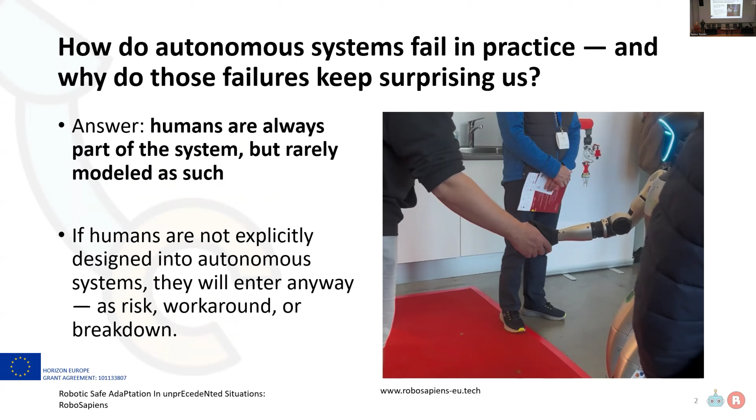Very briefly, what we do is that we observe robots in the wild. We go out in a number of workplaces to see how robots are actually working. Maybe you will say something about that, Peter.

Yes. So our methodology was, as you can see up here, we observed robots in the wild. Instead of doing it in the lab or doing a lot of simulations, we went out to companies using robots and how they were used, and had qualitative interviews with the people working there, walking around close with these robots.

And we compared all of these external field sites that we found, and we'll show you a picture later of a gathering of all of them. And we compared them to our internal field sites, where we had these 4 use cases, which we have heard from all 4 of them today, I think. And then we're using this sort of ethnography, which will allow us to observe different things that are not necessarily visible if you just look in the logs of the robots or in simulations or in KPIs for that matter.

So apart from looking at these robots who are already employed in people's everyday lives, and we'll come back to where, we also follow the process of designing in the RoboSAPIENS system. No matter what case we have been studying, even the cases when RoboSAPIENS began, we were told that in the Gunnerus, for instance, we wouldn't be needed because there wouldn't be any people involved. But of course, that was not really true. There were people involved everywhere. Even when we think that the systems we have created are completely autonomous.

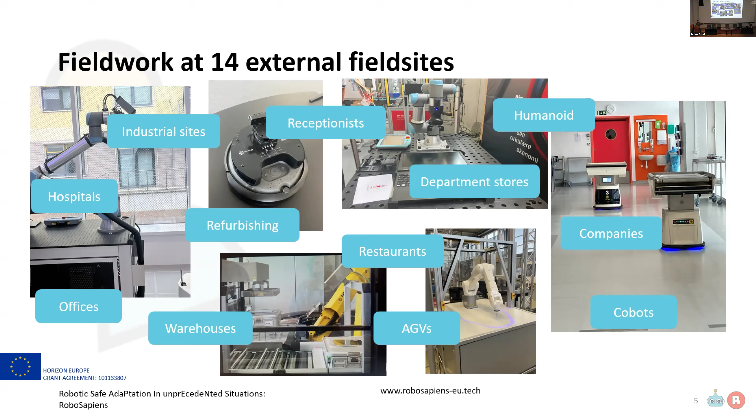And the reason we have done that is to actually see a variation. And when we have found this extreme variation in sites and types of robots, we have looked for what are there in terms of patterns that we can analyze goes across.

And one pattern we have seen across all these cases is that when we see the same robots that we're presented with in these real-life settings in media or at robot conferences, they do not look like they do in real-life functioning. They are much more well-functioning. They never break down. They never need human help. They are a completely different type of machines, you could say, from what we actually see in real-life settings.

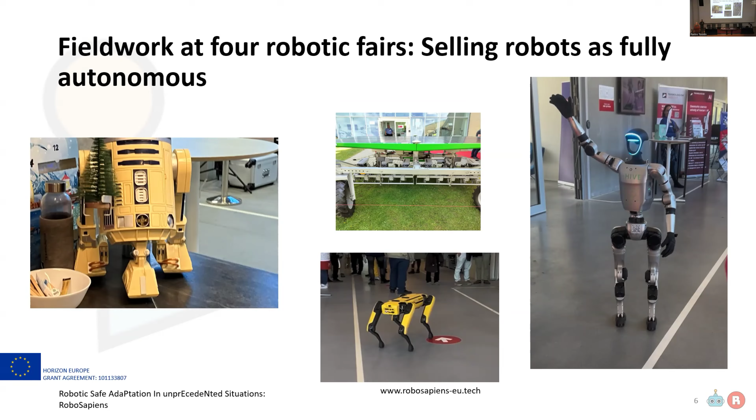You can supplement that? Yes.

At the conferences we've been to, robots are sort of sold as being more autonomous than they actually are, which creates expectations about full autonomy and adaptability of robots, both from the general public and also inside the field of robotics.

The reason for this is that the robots we see at these conferences are demos, and these are very controlled demos. Sometimes they're not even related to what the company and the robots they're selling are actually supposed to be doing—they're just a way to get people over to their stand. So the robots getting sold at these conferences are not really the robots being used in real life.

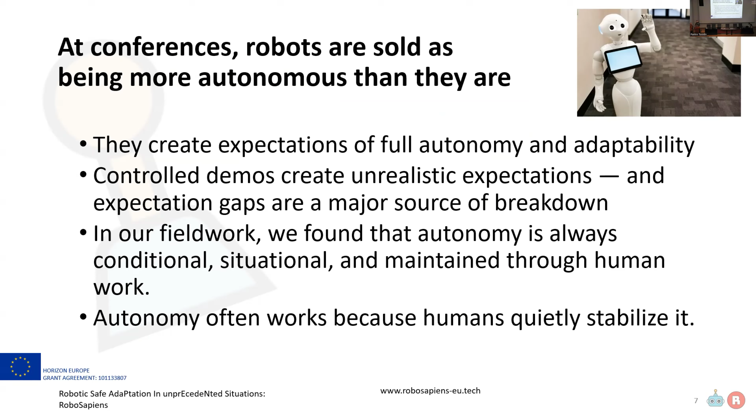What we're also seeing is that the autonomy sold at these conferences often only works because humans are there to stabilize it in some way. We have some examples of this, what we call collaborative autonomy.

We were at a restaurant with two robot waiters that helped deliver food, and a waiter dropped a glass. Usually these robots are supposed to stop if anything is in front of them so they don't hit customers or drive over glass. But in this instance, the robot was driving towards the glass, and the waiters had to quickly see it and press stop before it hit the glass.

They then had to guide the robot around the glass towards the station where it waits for the next delivery. While they were sweeping up the rest of the glass, the second robot came and drove completely through it, spreading it all over the floor, so again they had to stop it. The robot waiters don't really work without the human waiters there to assist them.

The second example is a company with a production department where, because of their more dynamic workflow, instead of having a conveyor belt through the entire factory, they have a big factory floor with 12 workstations and about 10 AGVs driving around between the stations and to a final conveyor belt to deliver various products.

When we were there, one of these AGVs, for some reason, stopped about 1.5 meters before the actual drop-off point, which led to a whole queue of AGVs standing in line, unable to deliver, and of course slowing down production in the factory.

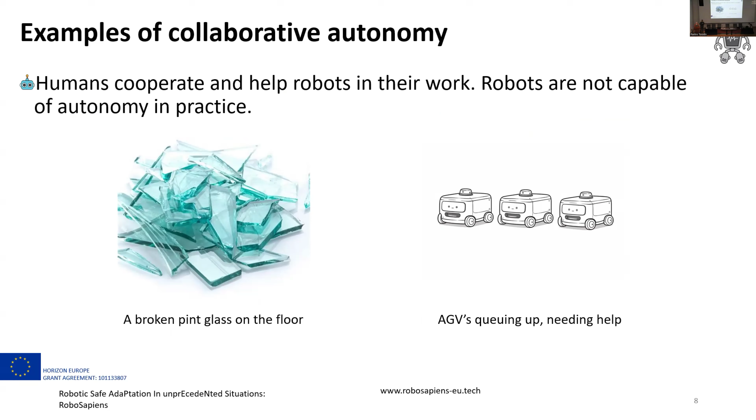This is something we see across all cases. We have never seen an autonomous robot in our studies—never seen a robot that could do without the humans around them. But that's not the story we are normally told.

So we think it's interesting to take this into account when we work with our partners in RoboSAPIENS to look at the transversal main analytical categories we found across all the cases: safety, trust, anomalies, sabotage, and sim to real.

In all of these, humans were involved. One example is that humans often don't apply the standards or rule-following that the technology creators think they should work from. In fact, across all cases, humans were not following rules—they were trying to make the robots adapt to their conditions, to what they think the work was about. So standards for safety are everywhere, but humans also break these standards or play with them.

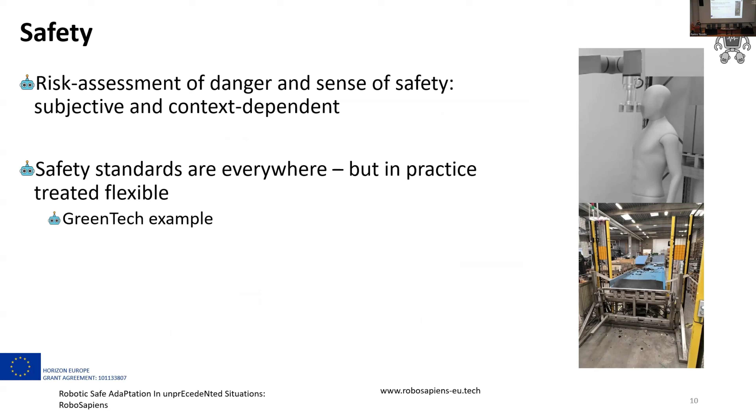The issue was that right on the other side of a little yellow fence, there was a very clear warning saying you should not put your hands anywhere near this conveyor belt or its start, because of the risk of falling electronic waste. What we observed, however, is that every single time they unloaded a container onto this conveyor belt, they always had their hands already rifling through it immediately, completely ignoring this important safety feature implemented at the company.

So humans are not just a nuisance in the system. The reason why they had a reason for doing so, it made their work life easier. But the people who made the robots had not inquired about what would make their work life easier. So it was a sort of workaround in the situation.

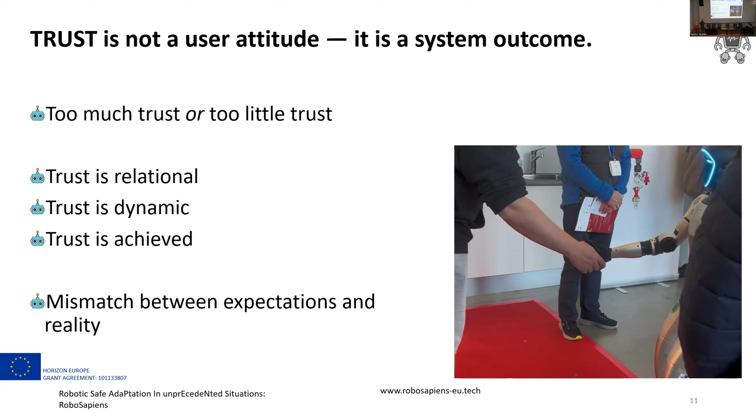Trust is another recurring theme, and we would say that that's also something that cannot be built into a technological system. It's something that comes in the dynamic between humans and machines. And it's often connected to this mismatch between people's expectations of robots as much more autonomous than they really are, and then the reality they meet. That can create even dangerous situations in our fieldwork.

And here we go back to these conferences a little, because there is this trust in robots. When you have too much trust in what a robot can do, it can lead to a perceived underperformance of what the robot can actually do in practice. We talked to specific companies selling robots to other companies, and the first thing they have to do whenever they're selling anything is say, it will never happen, it just can't, it becomes too complicated. So we have this 80-20 rule where we're trying to get the customer to scale back their expectations. About 80% of what customers expect, they can't live up to with these robots. And that's sort of the issue that comes with this trust.

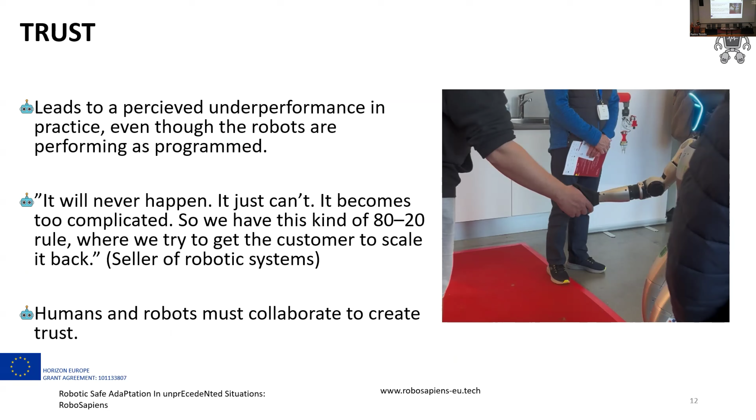This is people, even the people who are trusting it, even people in robotics. It's not just the general public. Everyone has this very large trust in robots.

And the last recurring theme we found across all the cases is that humans are not just taking the technology for granted. They are always trying to test it. When they get a new technology, they are what we call tinkering with it. It can be out of malice, or because they want to sabotage a system they don't like because they think the robot has taken over their work. But very often it's just simply curiosity.

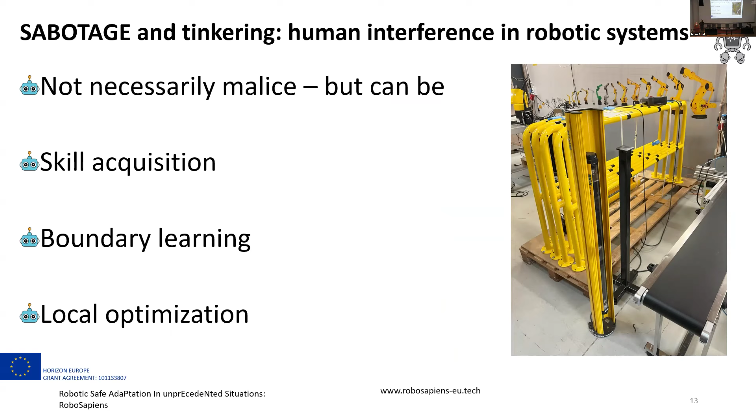What will happen if I put my hand through this fence that the manager has said I should not put my hand through? What would happen? Would it be something I could use in my work, or is it something that will disrupt something? Humans do that all the time, both people who are accustomed to robots and newcomers. Over time, through this kind of tinkering process, they learn the boundaries between themselves, their expectations, and what the robot is doing. That can lead to a local optimization of how they actually work together. So tinkering is part of the process of implementing robots.

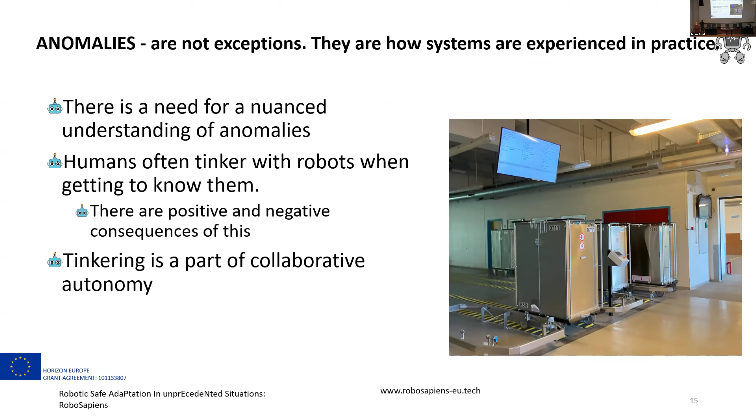We already heard about the safety things, so I'll skip that now. That also goes for what the robot may think of as anomalies, because very often in our fieldwork we've seen humans doing things to robots that robots will think of as negative anomalies, something the robot should react to negatively, or remedy the effect of the human intervention. But what it is, in fact, is often humans trying to help the robot. If the system doesn't allow for that, then a lot of problems go unsolved. So this kind of tinkering and helping the robot are part of the systems, not something outside of them. It's not an exception, it's something that goes on daily.

We've also heard in RoboSAPIENS about sim-to-real, and often we see that you do try to put humans in the simulated systems, but it's not the humans we know from our work. It's more like off-the-shelf humans, off-the-shelf simulated humans used almost like a table and a chair, but they move. That's what defines a human here. But they are not noise in what we see.

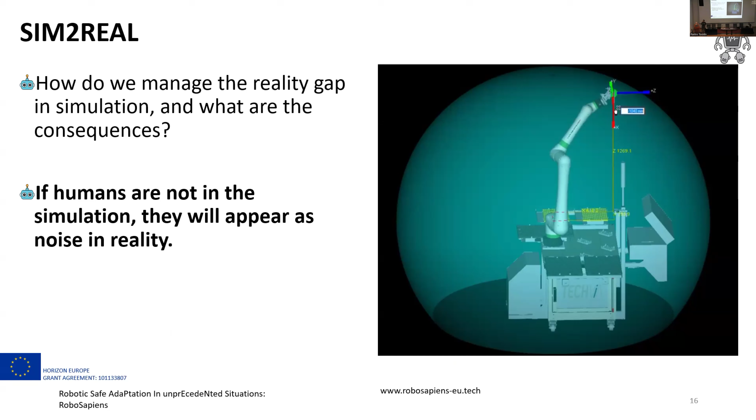They could be in the system in a more rewarding way, you could say, because what we would claim here from our fieldwork and our anthropological approach is that humans are not a disturbance to technological design. They are actually part of the infrastructure and should be considered like that when you design engineering technology. So that also means you could think about how humans are upholding robotic technological systems, maintaining them, but also consider how over-promising autonomy in robots can create a bad situation when the robots hit reality.

So I don't know if you want to end with the last word. And yes, the end, very quickly: designing for collaboration, and in this we mean collaboration with autonomy, of course, is safer than designing for independence where humans are not involved in the systems. Thank you.